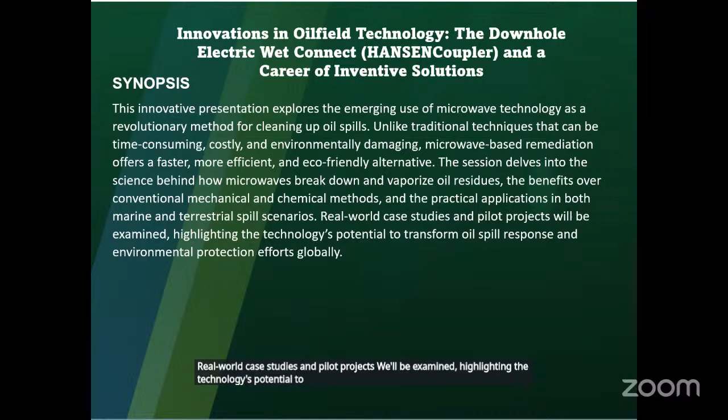Real-world case studies and pilot projects will be examined, highlighting the technology's potential to transform oil spill response and environmental protection efforts globally. Of course, to take us on this very interesting topic is Dr. Diret.

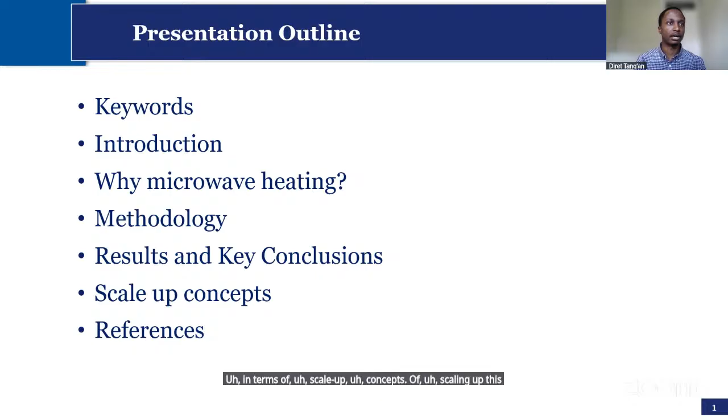From contaminated land problems. And then I will also take you through part of the methods that I have used in my work, as well as present a few results and draw key conclusions, and also give us a taste of what it looks like in terms of scale-up concepts of this particular type of research. All right. I'll be using these keywords, and I wish to just simplify them so that all of us will be able to follow on.

So, one, we are talking about land contamination, and precisely land contamination is simply the pollution of land surfaces, rendering them unfit for purpose. So, it could be a land that is meant for agriculture, but pollutants have been introduced upon that land, thereby rendering it unfit for purpose. It could be a land that was meant to be used for housing and redevelopment, but then it's not fit for purpose because it's contaminated.

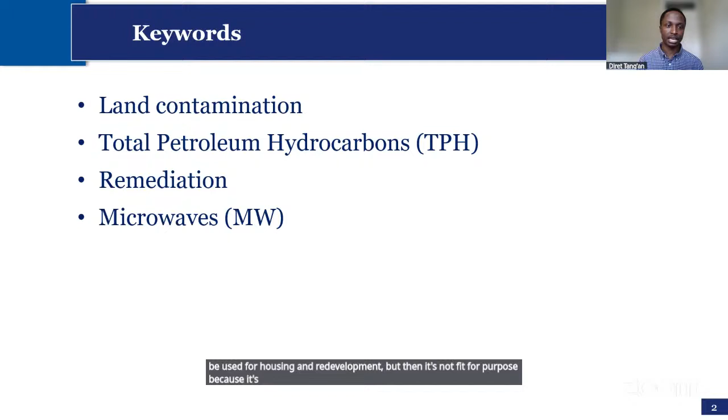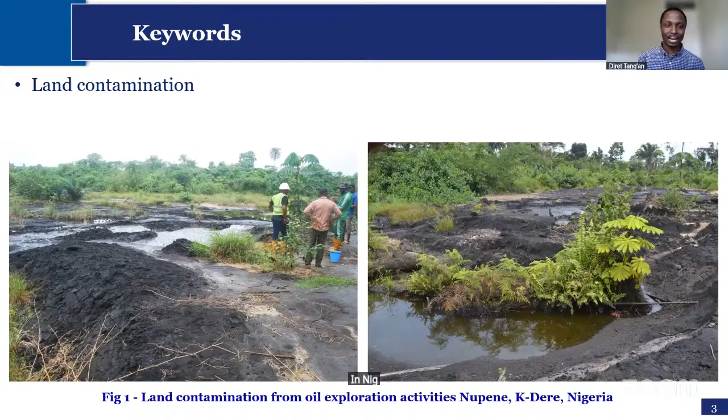And this is a typical scenario of contamination that we have seen over and over in the Niger Delta in Nigeria. And particularly, I will be focusing on a pollutant called the total petroleum hydrocarbons. Total petroleum hydrocarbons simply comprises the aliphatics, which means from carbon chain C10 right up to carbon chain C40, and another 16 priority polycyclic aromatic hydrocarbons. So those range of hydrocarbons constitute what we call the total petroleum hydrocarbons.

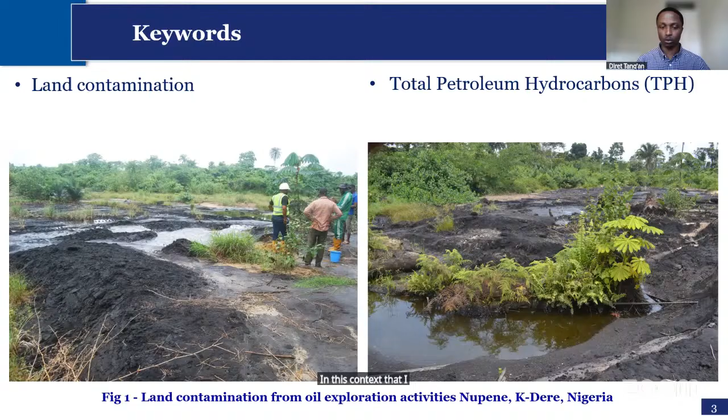And they are going to be the key pollutant that actually renders the land or the soil unfit for purpose in this context that I am talking about. And then the goal of remediation is actually to restore that polluted land and make it fit for purpose or for disposal as well, depending on the end goal of the remediation exercise.

So there are actually different approaches in remediating contaminated land, contaminated soils, or contaminated solids. And these can be classified in different ways. You can find these classifications done in different ways by different authors. But however, I wish to summarize it simply in this form. We have what is called the physical-chemical methods, such as soil washing.

And this method actually leverages on the physical-chemical properties of the contaminant as well as the soil to then separate them from each other. A particular example is soil washing, where you separate the soil based on their particle size. Those with smaller particle size tend to absorb more of the pollutant. And then you are able to concentrate the pollution within a certain particle size, and in that way, you can then wash that concentrated part of the material using different solvents.

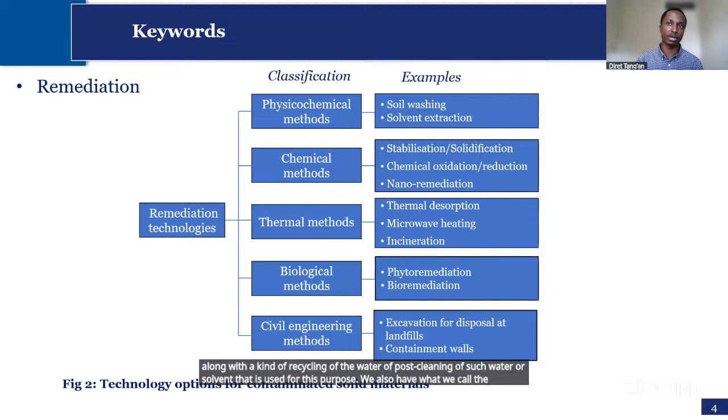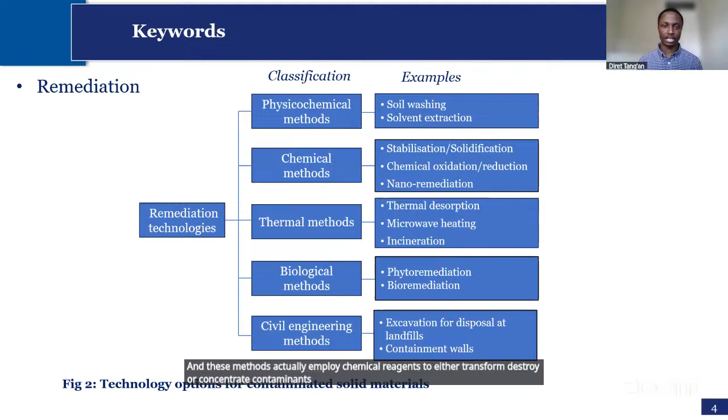And it could be water. And as well, this has to go along with a kind of recycling of the water or post-cleaning of such water or solvent that is used for this purpose. We also have what we call the chemical methods. And these methods actually employ chemical reagents to either transform, destroy, or concentrate contaminants in order to restore the land or the soil and make it fit for purpose.

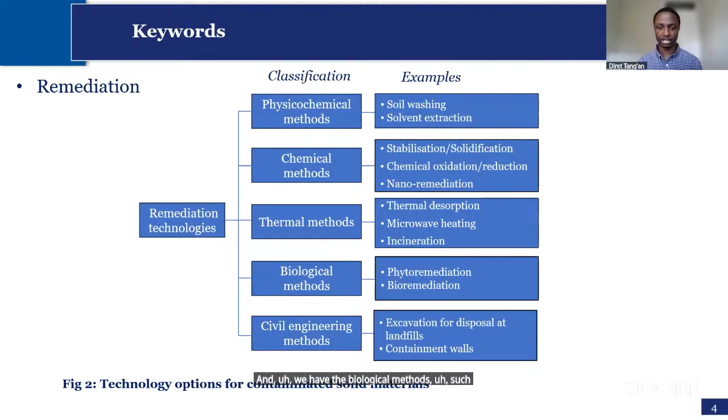And we have the biological methods such as bioremediation and phytoremediation using plants. And basically what these do is that you use living organisms to feed on the contaminant in the soil. And as they feed on that, they break it down and make it into a less toxic form, thereby getting the land fit for purpose.

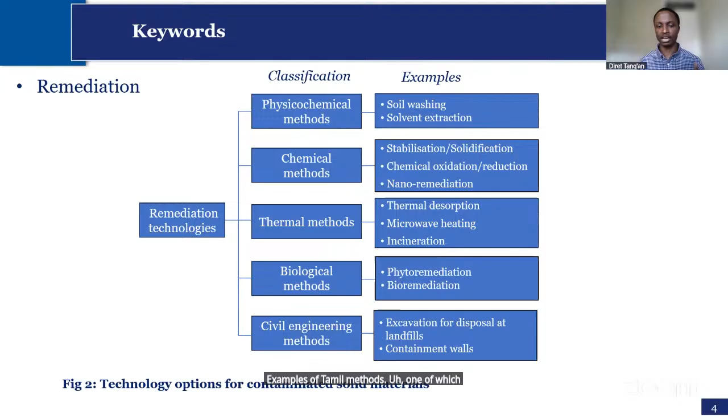And also, we have what is called the thermal methods, which I'll be focusing on more today. A typical example of that is thermal desorption, which is the conventional heating system where you heat up soil materials just to get rid of their contaminants. There can be different examples of thermal methods. One of which that uses very high temperatures is the incineration method, which basically destroys whatever the contaminant is.

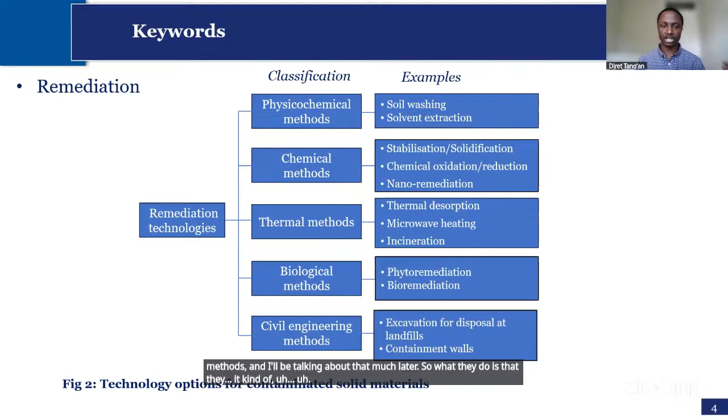But today I will be presenting a smarter way of remediating such soil materials other than using incineration at very high temperature within the thermal methods, and I'll be talking about that much later. So what they do is that they help increase the contaminant phase vapor pressure, thereby promoting vaporization of the hydrocarbon within the contaminated material. And then lastly, on this classification, we have what is called the civil engineering methods.

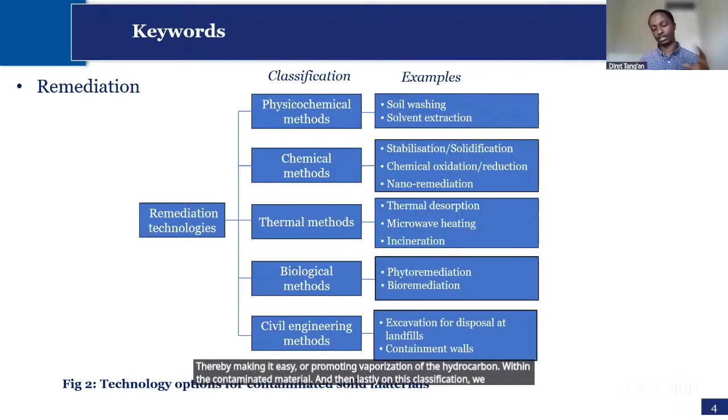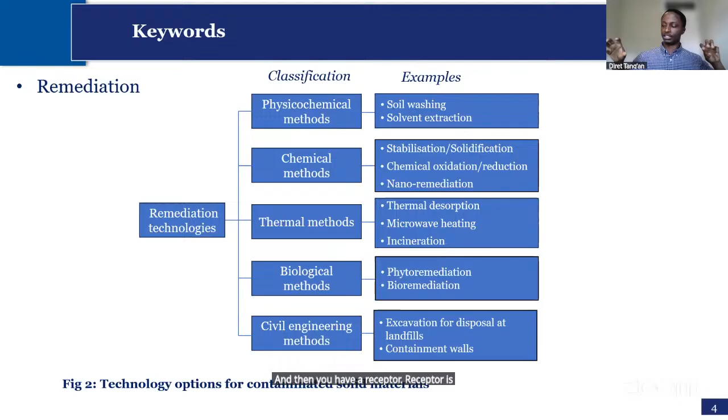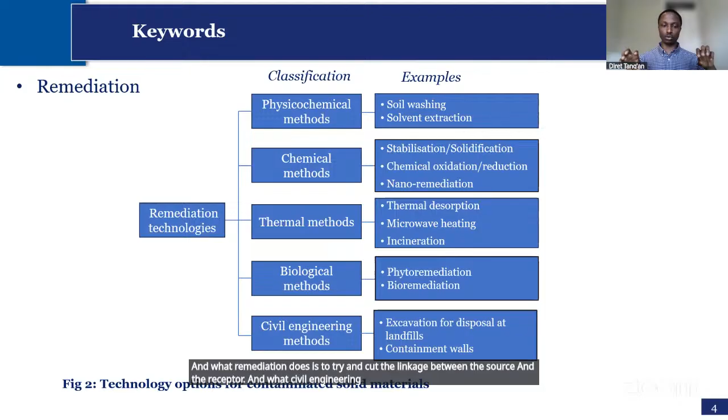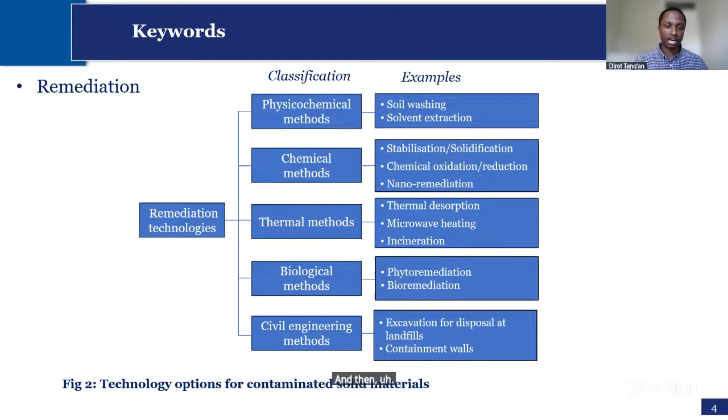What that does is, if you have a source of contamination, and then you have a receptor. Receptor is whatever is being affected by the source of the contamination. And what remediation does is to try and cut the linkage between the source and the receptor. What civil engineering methods try to do is create a barrier to stop the receptor from getting contaminated by the source. They use things like containment walls, or it could be excavating that contaminated source and then landfilling it somewhere safe that can be properly managed.

So microwaves are basically from the electromagnetic spectrum. I guess some of us are familiar with the electromagnetic spectrum, where you have different regions across different frequencies and wavelengths. Microwave exists between the radio frequency and the infrared waves within the electromagnetic spectrum, ranging from about 0.3 to about 300 gigahertz of frequency.

And many of us would have heard of microwave in terms of telecommunication application, in terms of communication in our mobile phones and other things. But today we're going to be looking at it precisely from the heating application approach, whereby these high frequency electromagnetic waves are applied to heat up materials.

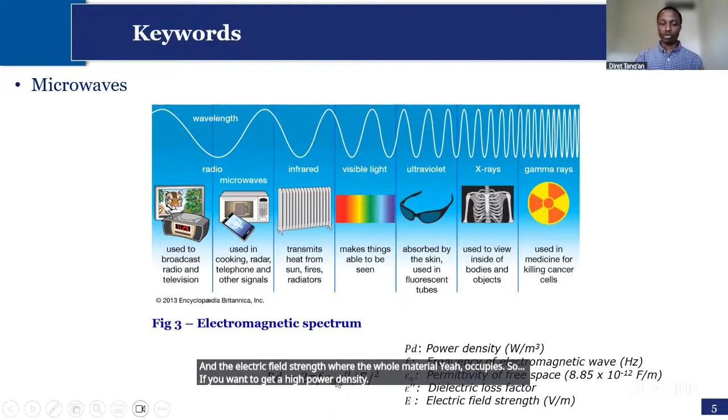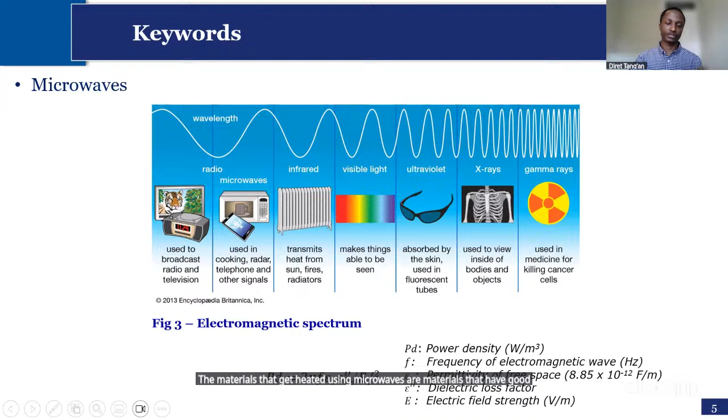So if you want to get a high power density, we try to play around with the electric field as well as the frequency within the whole system. Now, not all materials are heated using microwaves. But the materials that get heated using microwaves are materials that have good dielectric loss factor, which means that they're able to absorb microwaves more and dissipate heat in the process.

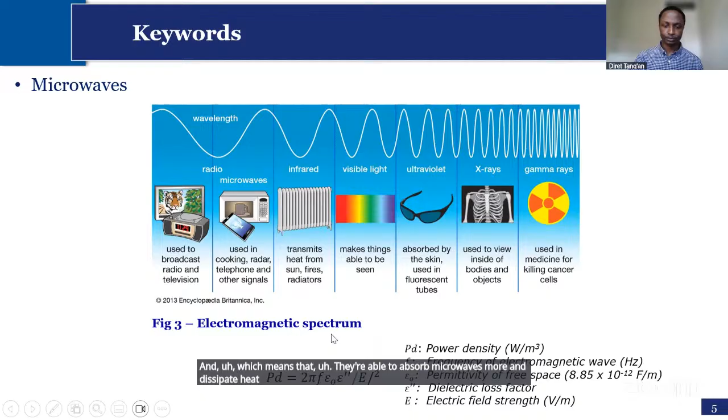And so for this technical session, I'll be giving us a case study with the research that I did during my PhD under the supervision of Dr. Lino, Dr. Mohammed, and Professor John Robinson here at the University of Nottingham.

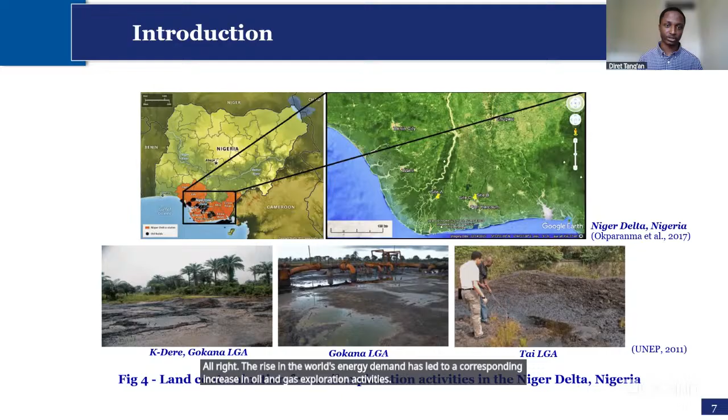The rise in the world's energy demand has led to a corresponding increase in oil and gas exploration activities. And during these processes, crude oil spillages or their refined products occur, leading to major environmental problems such as land pollution. We all know that the Niger Delta is the home to Nigeria's oil and gas reserve, and this region has suffered the effect of oil pollution for about 6 decades of oil and gas exploration activities. The Niger Delta contributes up to about 75% of Nigeria's foreign earnings, which means that Nigeria largely depends on the gains from the oil and gas activities within this region.

However, in 2011, the United Nations Environmental Program conducted an impact assessment of the oil and gas exploration activities within this region. And their assessment revealed an urgent need for the cleanup and remediation of this rich bioresource region. Nigeria's Federal Ministry of Environment estimated the level of oil contamination within this region to be about 9 to 13 million barrels of oil spillages. To put that in context, this is equivalent to the oil consumed in the UK over a period of 8 days. And this has impacted the lives of over 31 million inhabitants of that region, whose major employment used to be agriculture, food production, and fisheries.

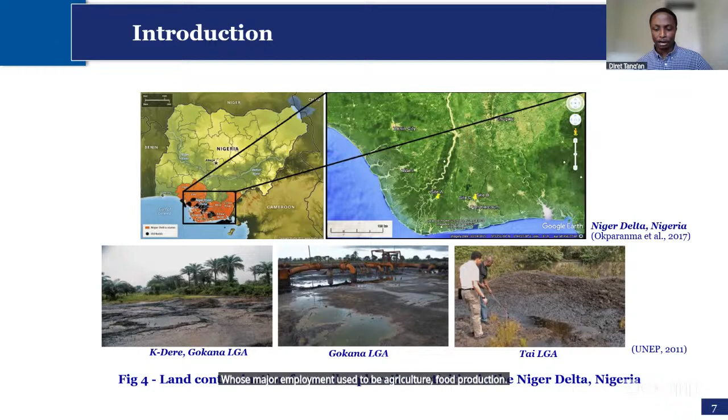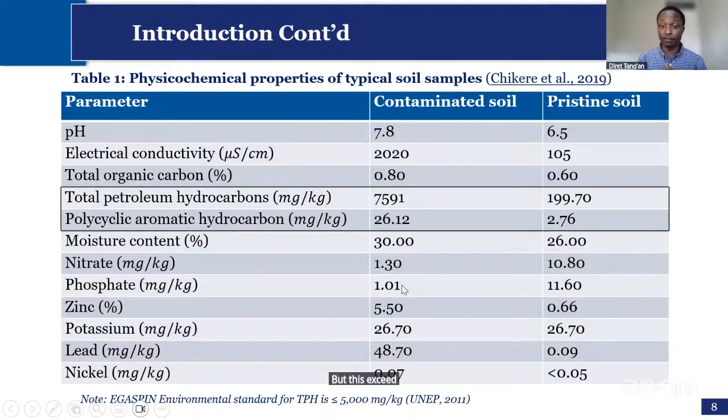And you can see clearly that this exceeds the acceptable limits set by the environment industry within Nigeria, EGASPIN, which is less than or equal to 5,000 milligram per kilogram. So this is the acceptable limit of oil spill that the oil industry considers safe. But this exceeds it a lot, and therefore is the focus of this particular research.

Now, although the government of Nigeria launched a cleanup exercise, the Ogoni cleanup in 2016, there was, however, no recommendation as to what technology will be the best in terms of cleaning the oil spills within that region. It is, however, clear that this is not going to be a single technology solution. It's not a one-size-fits-all approach, because that wouldn't be appropriate, because different sites have different characteristics. They have different levels of oil contamination. They have different types of soils. They have different other properties, like how much of the oil has been spilled in that region over how many years. So you don't expect that one technology will be the ultimate solution.

Generally, we think that it's going to be a combination of different technologies, and that's why I started by introducing the different categories of technology approach in solving land contamination problems. And that is actually what will proffer a more efficient solution to the problem in the Niger Delta. However, one technology solution is microwave heating. Why microwave heating?

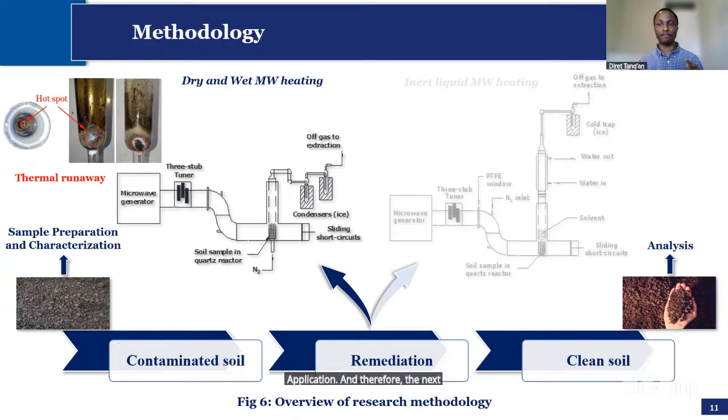And precisely, this is one of the major challenges that has hindered the scale-up of this technology for commercial application. And therefore, the next phase of the research has been focused on trying to overcome the problem of thermal runaway. And that leads us to using the inert liquid system, which I've explained. The contaminated soil materials were immersed in a solvent that is transparent to microwave and then heated using microwave energy. The same process happens. However, because it's immersed in the solvent, the solvent helps to control the temperature within the system, thereby managing the problem of thermal runaway.

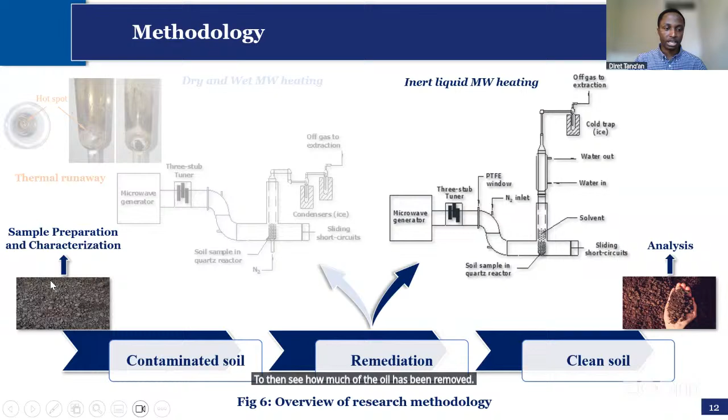And indeed, we're able to overcome the problem of thermal runaway using the inert liquid system, after which we collected the soil materials and then analyzed them for oil content to see how much of the oil has been removed from the initial oil content of the materials.

Now, what were the key findings from this work? We're able to achieve oil removal using the UK contaminated soils or solids up to about 87% in less than 7 minutes. Also, filter cake achieved up to about 95% oil removal in less than 4 minutes.

And for the Niger Delta soils, we applied the process of overcoming thermal runaway, which is using the liquid inert system, to then apply that technology on the Bodo and Kedere soil. And we got up to 65% oil removal in 10 minutes for Bodo soil and up to 80% oil removal in 1 minute for Kedere soil. And these were actually below the standard set by EGASPIN of 5,000 milligram per kilogram. So we're able to meet this standard with the Niger Delta soil using the inert liquid system.

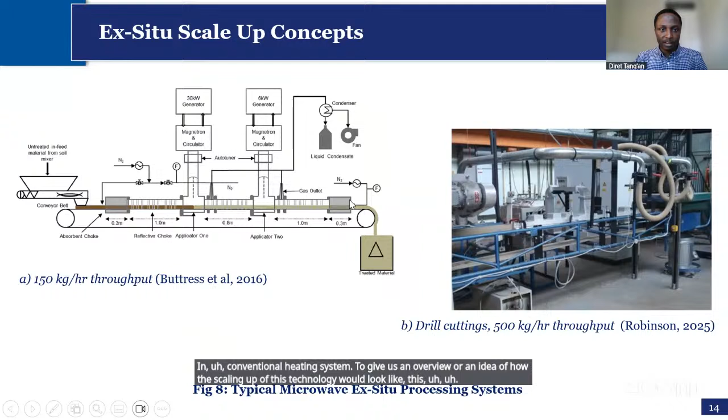To give us an idea of how the scaling up of this technology would look like, these are a few works that have been carried out here at the University of Nottingham by Buttress and the team. I currently work within the team of Buttress. Robinson was my supervisor during my PhD, and this is a typical pilot plant for the decontamination of drill cuttings, which has about 500 kilogram per hour throughput processing capacity, while the system by Buttress has a capacity of processing about 150 kilogram per hour of material.

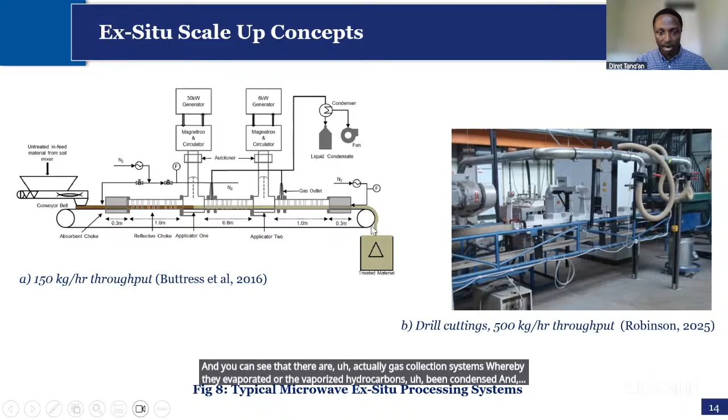And when you look at the entire process on an industrial scale, this is what it's actually going to look like. You would have the contaminated soil being excavated and then loaded using a conveyor belt into the system, going through the microwave applicators where the microwave energy is supplied using magnetrons. It is at this point that the material is heated with microwave, and you can see there are gas collection systems whereby the vaporized hydrocarbons are condensed and recovered, leaving behind clean soil at the end of the process.

And this is actually an ex-situ application. Ex-situ means that you are not doing the treatment on site, but rather you're digging the soil and moving it to the remediation site where you have your equipment, and then you treat the soil. After treating the soil, you then backfill the site where it was excavated.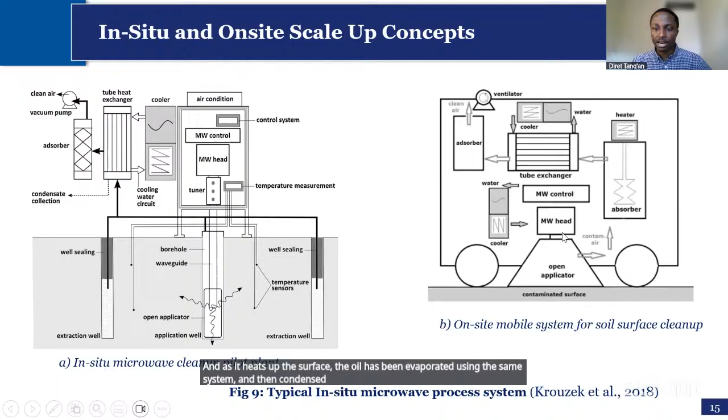And similarly, they designed a mobile system for soil surface cleanup, where the microwave system operates like a vehicle that drives along the contaminated surface and heats up the surface. As it heats up the surface, the oil is evaporated and then condensed and recovered as well. However, this mobile system would be suitable just for surface cleanup where the oil contamination has not gone too deep into the soil. So this is an idea of how an industrial application of this technology is going to look like.

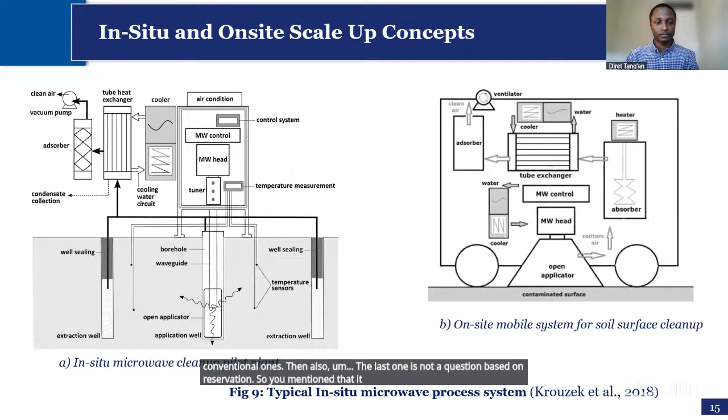Then also, the last one is not a question, but an observation. You mentioned that it treats to below 5,000 milligrams per kg. Just to point out that what EGASPIN refers to as 5,000 milligrams per kg is the intervention value. An intervention value is a value that once you attain, you are compelled to remediate the soil. That's not the value we expect you to treat to.

You're supposed to treat any contaminated site to values that will support life, let me put it that way, or the baseline values you got. That's what you're supposed to treat to. But once you get to 5,000, then you are compelled to. You have no case whatsoever. Exactly. So that's what 5,000 milligrams per kg is. I just needed to point it out.

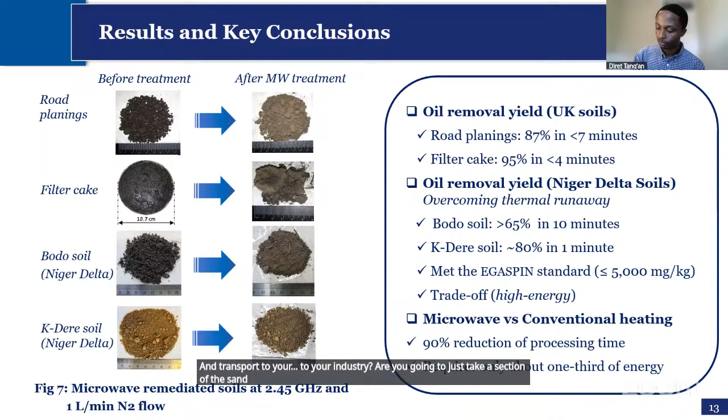And then finally, I'm just wondering, if you have an entire community polluted, how do we put this into industrial use? Are you going to pick up that sand and transport it to your industry? Are you going to just take a section of the sand? How are you going to effectively use that at industrial level?

And what happens if the depth of pollution is quite deep? Does time come into view? Do you consider time in the equation that guides this process? I mean, a pollution that happened today and a pollution that happened 10 years ago, do they have the same effect? I'm sorry, I have several questions. That's how much interest I have in your presentation. Okay. Can I respond to that? Please, you can go on.

Okay, thank you. So in terms of the soil composition, when I explained the principle, I said it leverages the moisture that is trapped within the soil pores. In conventional heating, you have to heat the soil material right up to the boiling point of the hydrocarbon to get rid of the hydrocarbon. That is why you have to use much higher temperatures, and in the end, it leaves the soil dead. Now, in terms of microwave heating,

it heats the moisture within the soil and rapidly converts it to steam. All of us know how steam tries to escape out of the pot. If you have steam trapped somewhere and it tries to escape, it's like it's flushing itself out of that pot. So as it is going out of the pores, it strips off the oil that is on the soil. I'm not sure if you understand my illustration clearly.

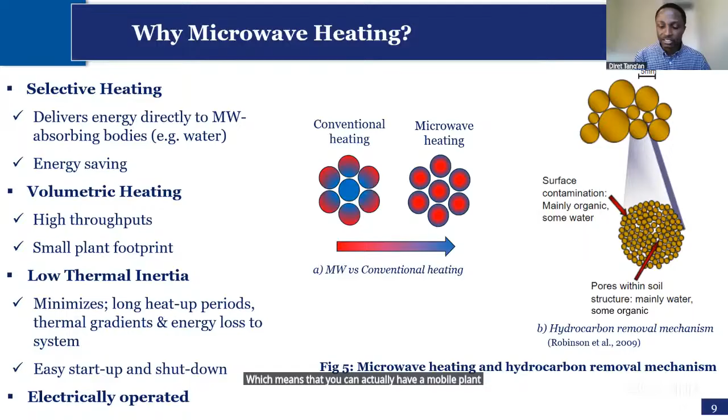We use steam stripping or entrainment to illustrate some of this mechanism. And then also in terms of if a community is polluted, like I mentioned initially, one of the advantages of microwave is that it has a small plant footprint because of its high throughputs, which means that you can actually have a mobile plant. So like the scale-up that I showed initially, these are things that can be moved. This setup can fit into a container.

You can fit a microwave process in a whole normal container, and you can take it to site, clean up that site, then move it to another site, clean up that site, move it to another site. That is the advantage of its smaller footprint. It can be a mobile kind of plant, a mobile process. And that's one of the advantages over conventional heating that has large capacities, and to establish that is going to take a whole lot of space, and decommissioning and moving it to another place can be an additional cost as well.

So in terms of such a community, you just need to move the system to where the pollution is. If you're treating it ex situ, you excavate the soil, you run the soil material through the microwave processing system, and you get your clean soil. Once you're done with that site, you pack the system again, move it to another site. So it gives you that flexibility in terms of process. So that's one of the key potentials of this technology.

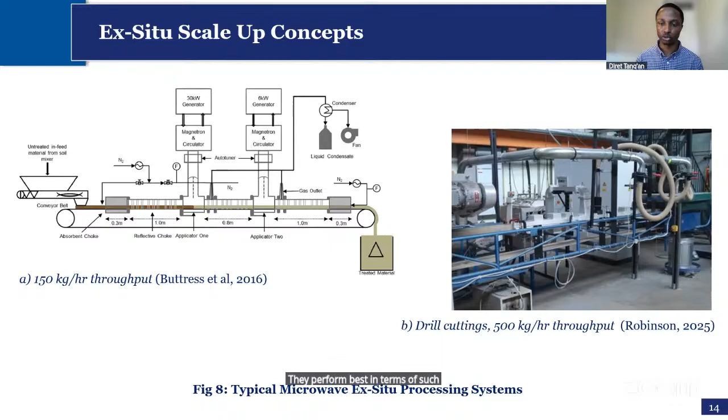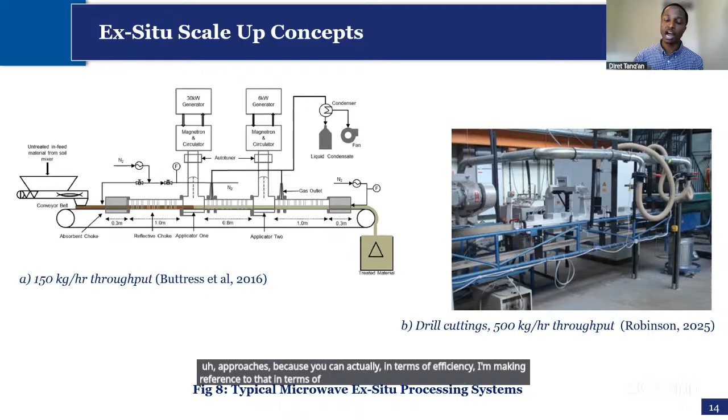Like I said initially, these are pilot scale demonstrations. There are still studies going on to try to overcome some of the challenges that are limiting it from being scaled up. And I talked about one of those being the issue of thermal runaway, managing the temperature within the system. So in terms of deep pollution, microwave heating actually offers a good advantage, because if you're dealing with highly contaminated sites, that is where thermal technologies generally perform best compared to other approaches, in terms of efficiency, how much of the oil they can remove from the soil.

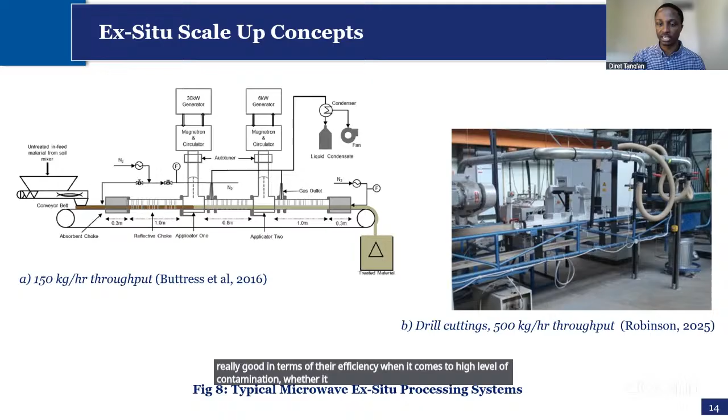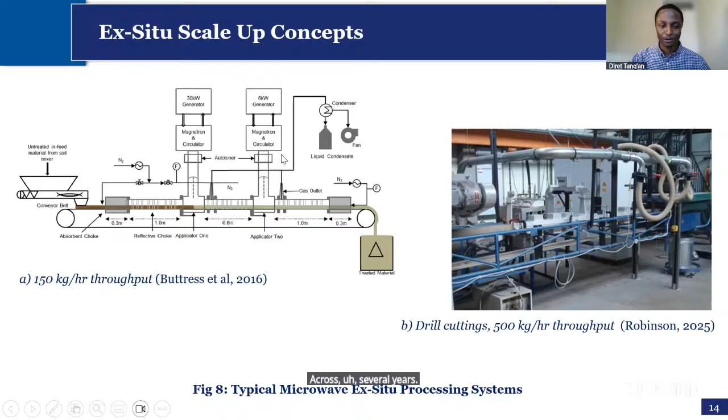So microwave will have a good potential for sites that are deeply polluted, because of course you need to dig that site up and apply your microwave system to the soil that has been excavated, and then backfill it after remediation. So generally, thermal processes are really good in terms of their efficiency when it comes to high levels of contamination, whether it's been there for several years or just a few years. Whereas bioremediation and some other remediation approaches would have difficulty with high levels of contamination that have happened over and over across several years. Thank you. I hope this is clear.